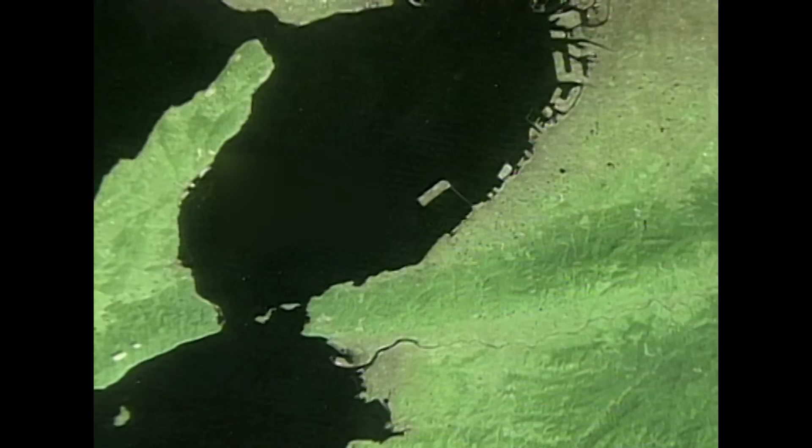Off the coast of Japan, there is a superstructure so immense it can be seen from space. The world's first airport in the midst of the sea. The largest man-made island of its day. The longest bridge of its kind. And one of the world's architectural masterpieces.

But its brilliant design could not conquer a hostile Earth. Today, low-tech ingenuity saves its high-tech engineering. Is Kansai the airport of the future? Or is it doomed to sink beneath the waves?

Japan, where modern skyscrapers dwarf the monuments of ages past. Where timeless serenity mingles with industrial might. And one of the world's engineering marvels rises from the sea. A superstructure for the 21st century, the mile-long terminal at Kansai International Airport hovers like a giant silver bird atop a man-made island in Osaka Bay.

Graceful in design, Japan's aerodynamic airport is a triumph of construction and a technological wonder. It was quite extraordinary to me that when the building first opened, it was getting 10,000 visitors a day who were not there to fly, they were there to look at the building. And that says something.

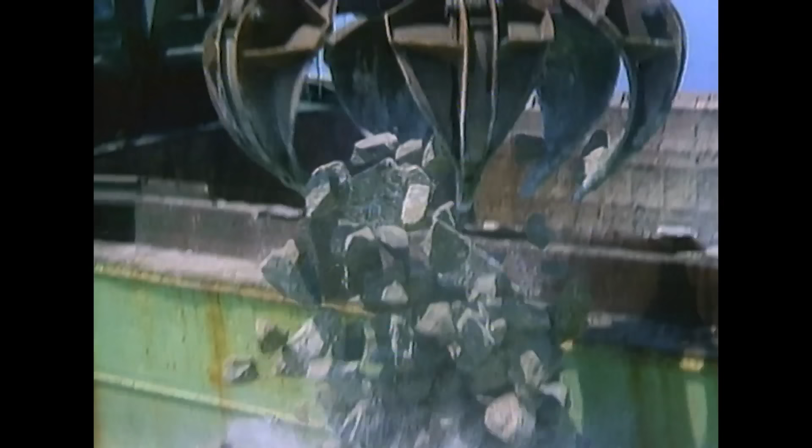To build the world's first ocean airport, architects and engineers probe deep into the laws of nature, searching for answers to the awesome challenges before them. Thousands of workers labored 7 years building the biggest man-made island of its day, more than 3 miles from shore in water 60 feet deep. Then crowning it with the world's longest building, the biggest public works project of the 20th century.

The airport is the first place and last place people normally see at your city. So you want it to represent something about your city. You want it to look good. You want them to have a favorable impression when they arrive and when they leave. We don't build big cathedrals anymore, but we build big airports.

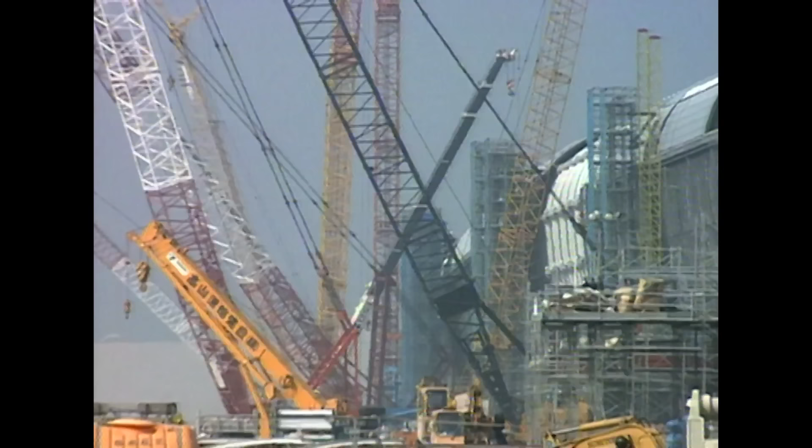Today, Kansai International is a glittering masterpiece, widely regarded as one of the world's most beautiful airports and one of modern history's most daring engineering projects. Before Kansai, no one had ever built an island in water so deep or so far from land. From steel girders to workers' lunches, everything had to be transported to the construction site by boat.

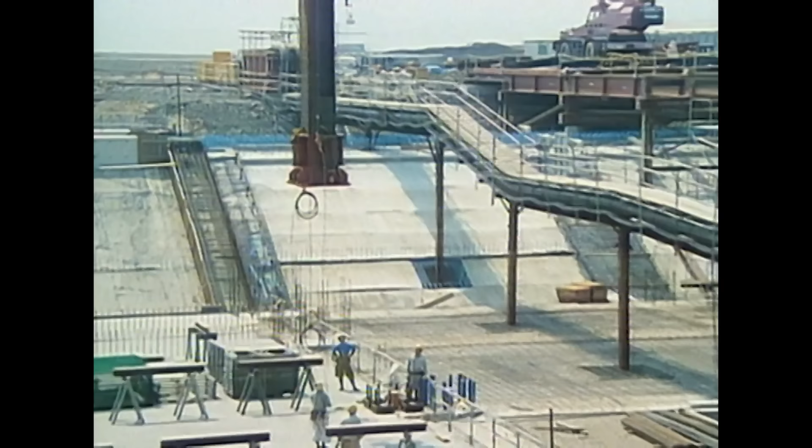To create the island, work crews had to move 750 million cubic feet of earth, pound 1 million steel columns into the ocean floor, and labor over 10 million man-hours. I scouted the location by helicopter, and I thought, oh my God, this might be a big challenge.

Why did Japan take on the challenge of building an airport on the sea? Because daunting as that challenge was, building Kansai International Airport on land would have been next to impossible. Kansai is a 10,000 square mile region in central Japan, straddling the island of Honshu, some 300 miles southwest of Tokyo. Within its boundaries lie two of Japan's most important cities, the sprawling industrial centers of Osaka and Kobe.

In the 1960s, Kansai cities were losing ground. Japan's imports and exports flowed through Tokyo. To compete with Tokyo, Kansai needed a new international airport. This airport was not only very important for Kansai, but also for the whole Japanese economy. Before Kansai Airport, manufacturing companies based in Kansai had to send their cargo all the way to Tokyo to ship it out of the country. That was very inconvenient.

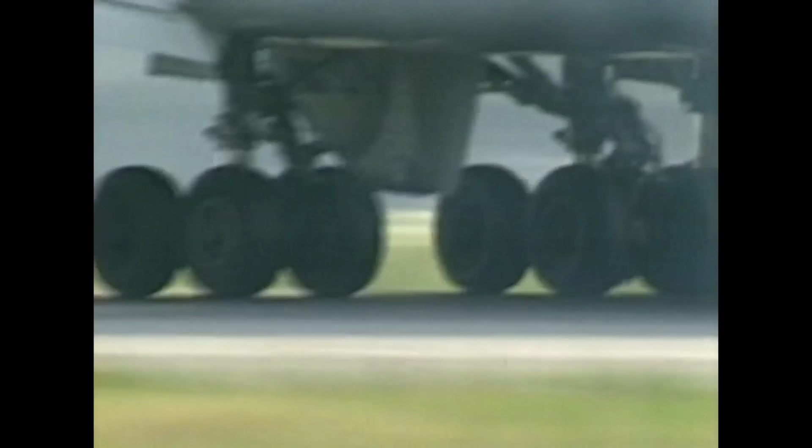Osaka's airport, Itami, sat in the middle of a residential neighborhood, dangerously hemmed in by buildings. The constant roar of jet engines disturbed its neighbors. There's no way that you can get around it. The airplanes fly over, they make noise, they have particles of emission from the jet engines, and those end up in people's yards, on people's roofs, and in people's ears when they're trying to watch television or have a barbecue.

Too many families lived in that area, so the potential there was a dangerous one if something ever went wrong. Thank goodness it didn't. At the far end of the runway, just on the approach, there was a school. We were always cognizant of the school being there, which is not the greatest thing. Expanding Itami was out of the question, but so was finding land for a new airport. In heavily populated Japan, there was little empty land and few people willing to give up land they owned.

In 1969, Tokyo began construction of an international airport at Narita, a distant suburb largely populated by farmers. When the government confiscated farmland to build the airport, protests exploded. Outraged farmers besieged the Narita construction site. Leftist radicals fired rockets across the runway.

Police arrested more than 3,000 activists. 7 people died. Protests delayed construction of Narita Airport for nearly a decade. In the Narita case, the government carried the plan forward without giving much information to the people. You might say the government forced its plan on the people, and that caused a strong movement against the construction.

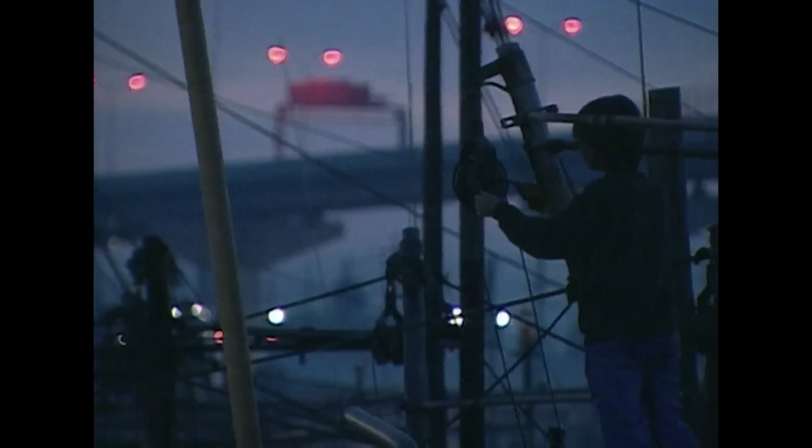But the plan had other perils. Osaka's fishermen might oppose a water airport as bitterly as Narita's farmers had battled an airport on land. Fish travel their own routes, which the fishermen know. If there's any change in those routes, it's very difficult for the fishermen to catch fish. It's not like the fish travel along marked highways. To find them again is very difficult.

To avoid another Narita, authorities offered the fishermen a huge fee as compensation for disturbing their fishing grounds. The fishermen accepted. Politically, the path was now clear. But the project's troubles were only beginning. By locating their airport on water, Kansai's planners had avoided battles with outraged citizens over land. Yet they would soon find themselves battling a far more powerful force, the force of nature itself.

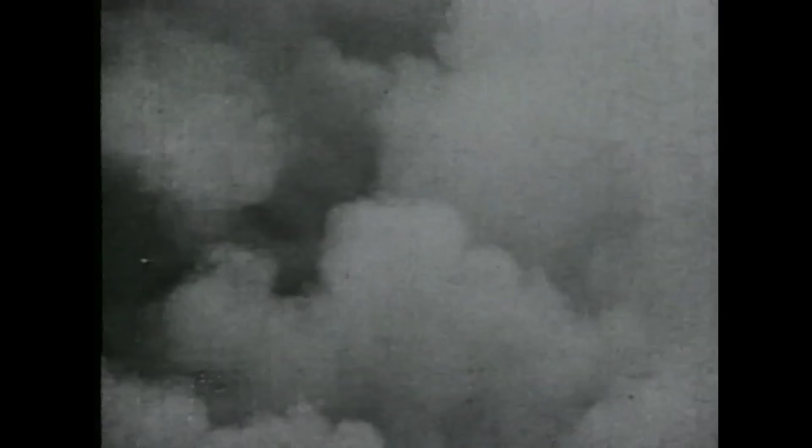Japan's 4 main islands have been called the most geologically treacherous real estate on Earth. 9 major earthquakes greater than magnitude 7 struck in the 20th century alone, killing over 150,000 people. Thousands of smaller temblors shake Japan every month. An earthquake's worst damage is often to structures built on landfill, which liquefies when shaken.

When it isn't shaking, Japan is reeling from some of the deadliest storms on the planet. Since World War II, hundreds of typhoons have ravaged the Japanese coastline, killing nearly 7,000 people. A typhoon's cyclonic winds can whip up what meteorologists call a storm surge, a dangerous rise in sea level. On September 21, 1934, a storm surge raised the level of Osaka Bay 10 feet for several hours. That typhoon killed 3,000 people.

3 miles from shore, the new Kansai Airport would be fully exposed to a typhoon's fury. Would a typhoon someday tear the new multi-billion-dollar airport apart? Would its foundations dissolve in an earthquake? Would storms or earthquakes sever its links to land? The new Kansai Airport had to survive some of nature's most powerful onslaughts.

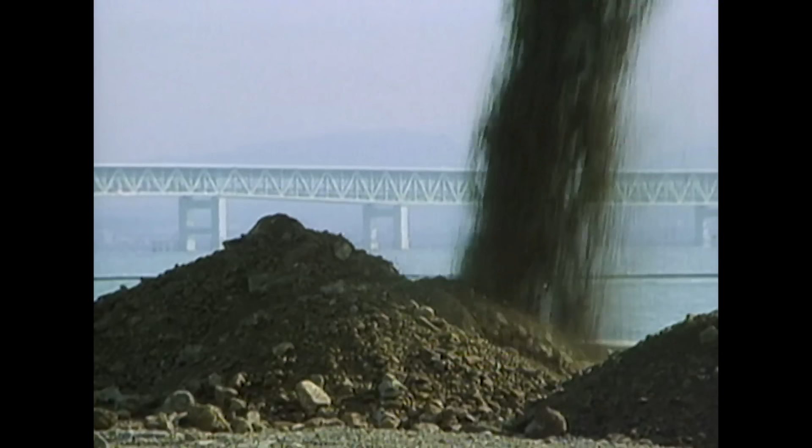Engineers designed an island 2.5 miles long and nearly 4,000 feet wide, framed by a huge rectangular seawall, whose perimeter would be 7 miles long. Into this massive frame, they would pour 750 million cubic feet of earth. It seemed like a simple plan, a larger version of other projects Japanese engineers had successfully completed many times before. In land-starved Kansai, the shore is lined with industries built on man-made land.

But 3 miles from shore, conditions were very different. The seabed is something like 100 meters or so depth of soft clay. So soft, in fact, that if you could drain the sea away, you wouldn't be able to walk on it, as a marsh. Tests showed that the airport island would rest on 2 levels of ocean-bottom clay. The upper layer, called alluvial clay, didn't worry engineers. They had built on it many times before.

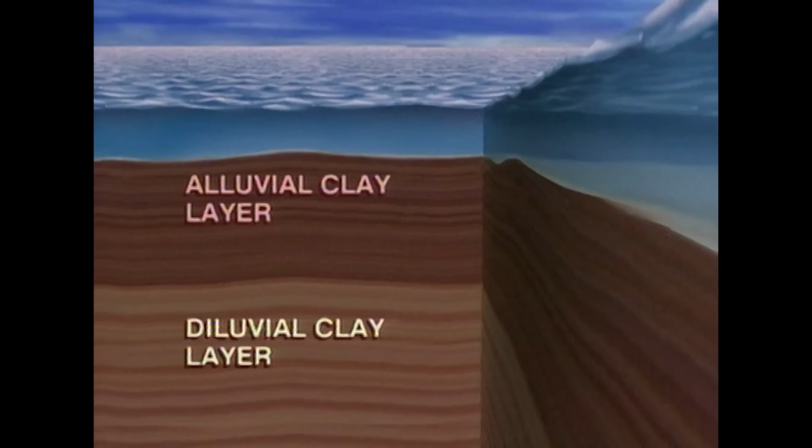But 3 miles from shore, there was a deeper, older stratum called diluvial clay, extending 1,000 feet below the alluvial layer. Engineers had never built anything on this diluvial clay. No one was sure how it would react when the world's largest man-made island began pressing down on it. So the new problem is how to predict the compression of deep-seated, old, stiff clay. That's, I think, the first case in the human engineering history.

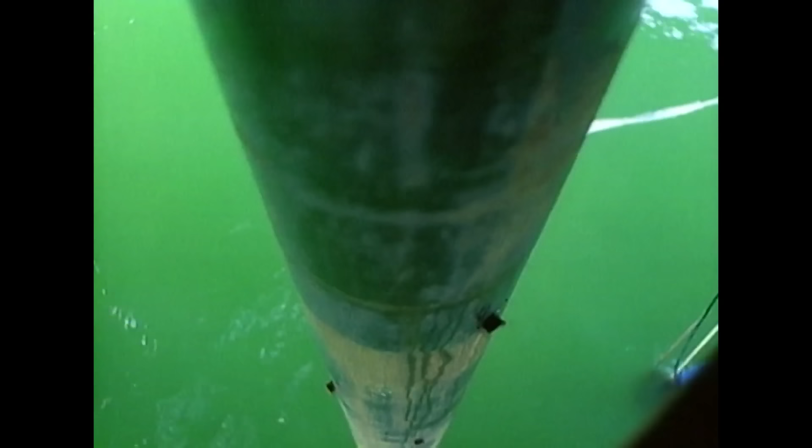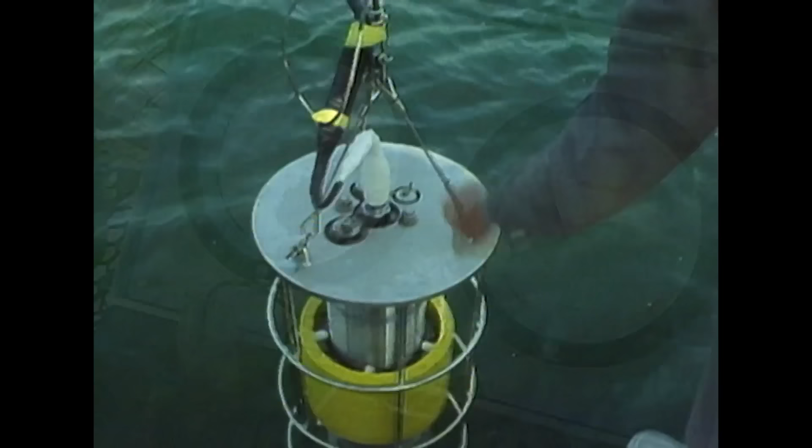In order to know the condition of the foundation ground, we developed a method of sampling the clay itself. We calculated things like strength and pressure density correlation to learn the characteristics of the ground. Scientists analyzed core samples from the ocean floor and gave differing predictions of how far the airport might sink into the clay. Some believed it would sink only 19 feet. Others insisted it could sink as deep as 25 feet.

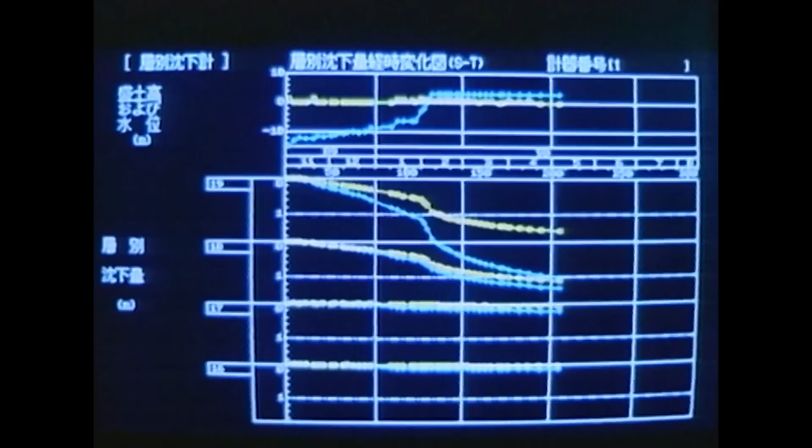Officials made a fateful decision. To save money, they rejected the predictions of deeper sinking and planned an airport that would sink only 19 feet. January 1987, with prayers for the safety of the workers, construction of Kansai International Airport begins. The first task is to strengthen the soft ocean floor clay so it can support the airport's immense weight. To strengthen the seabed, engineers use a well-tested method known as sand draining.

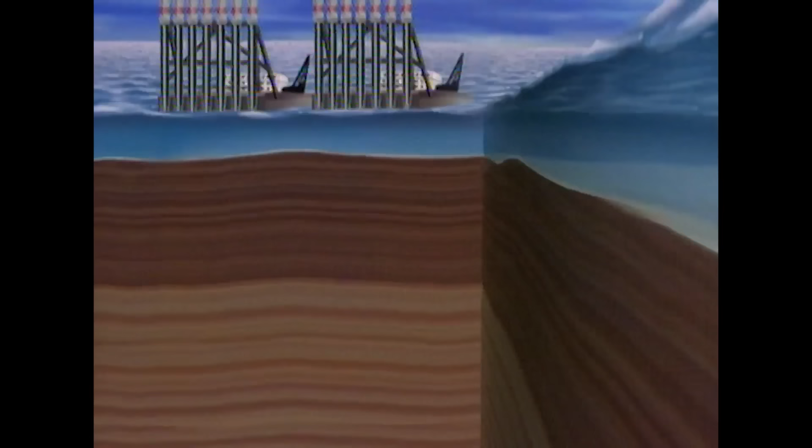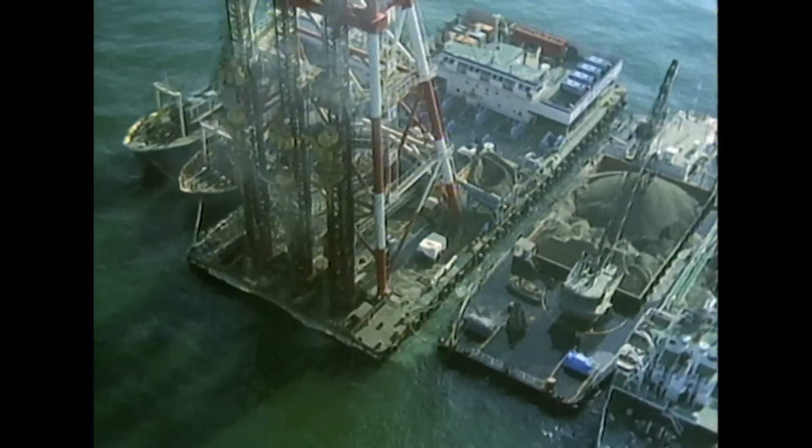Specially designed ships float over the construction site, first spreading a 5-foot layer of sand over the ocean floor. Then, hammering 1 million pipes deep into the clay. It's a fully automated process, controlled by shipboard computers. Next, enormous barges equipped with pile drivers force sand into each pipe. Finally, the computer-controlled ships pull out each pipe, leaving 1 million columns of sand.

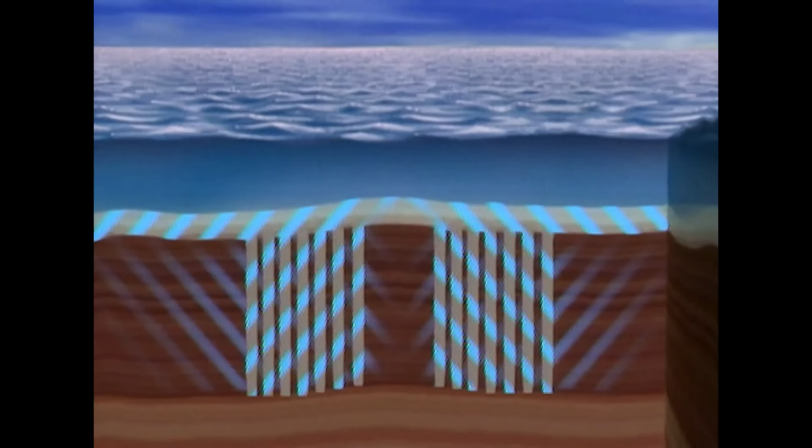When the finished airport presses down on the waterlogged clay, its weight will squeeze the water from the clay into the sand piles, draining the clay to make it harder. But the sand drains cannot reach the deeper diluvial clay. Nothing can be done to stabilize it.

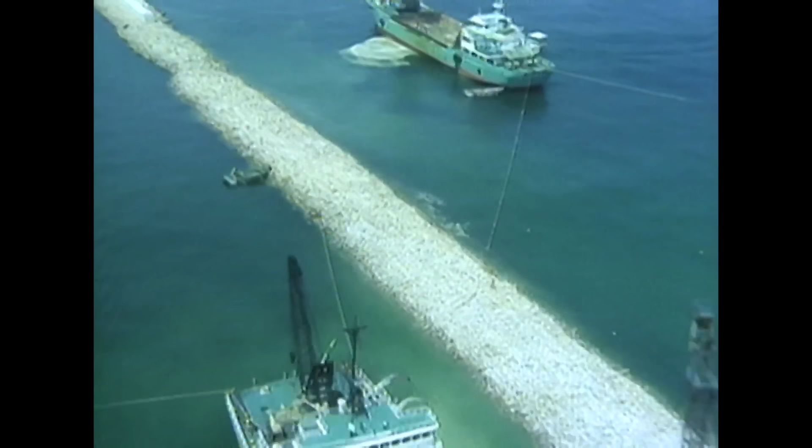With sand drains in place, work on the seawall begins. To keep waves from washing away its rubble slope, seawall workers must armor its surface with massive stones. 60 feet below the surface, divers guide these armor stones into position. The divers are veterans of many underwater construction projects, but none as deep and as far from shore as Kansai Airport. They face deadly hazards in the turbulent ocean depths.

At this place, we set stones that are about 1 to 2 tons each in the water. It was far from the shore, so there were bigger waves. It was a challenge for us. We did it even in tough situations like in bad weather. One guy had his leg amputated at the thigh because the waves moved a stone and it smashed into his leg. We were always close to death in a way.

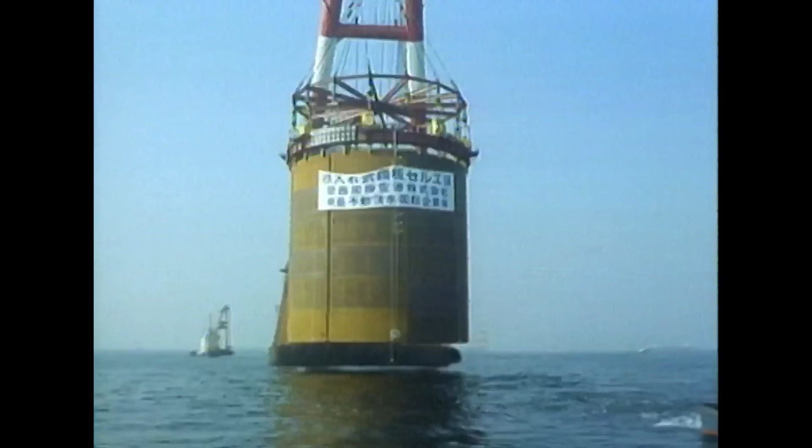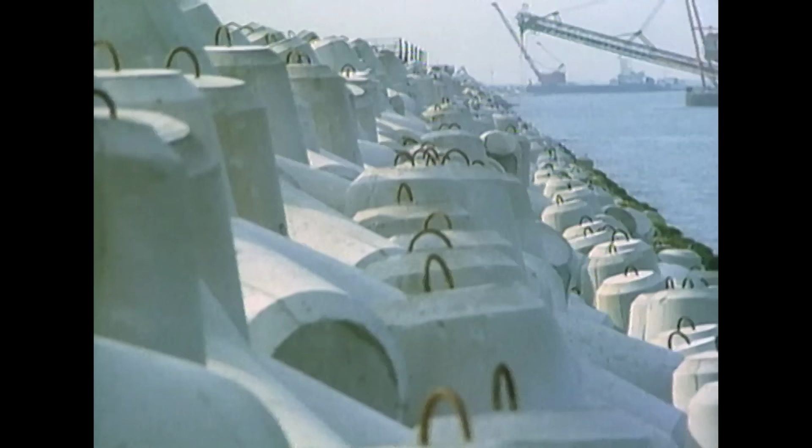Despite the dangers, work on the seawall continued as workers maneuvered 69 gigantic steel chambers into place. Each of these mammoth casings was 75 feet high, 75 feet in diameter, and weighed over 200 tons. Pile drivers pounded them into the ocean floor to form the corners of the seawall. Workers placed 48,000 four-pointed concrete blocks along the seawall's south and western edges, where the sea was strongest. These strange-looking blocks are designed to dissipate the force of breaking waves.

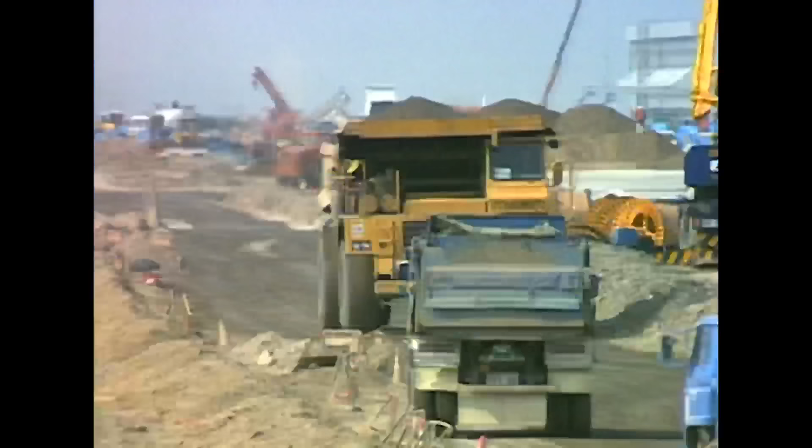By June 1989, 2.5 years after work began, the seawall was finished. Now, the airport builders had to find enough soil to fill it. On the mainland, crews worked round the clock excavating 3 entire mountains. Huge barges transported the excavated soil to the airport site. For 3 years, a fleet of 80 ships dumped earth inside the seawall until it rose over 100 feet above the ocean floor.

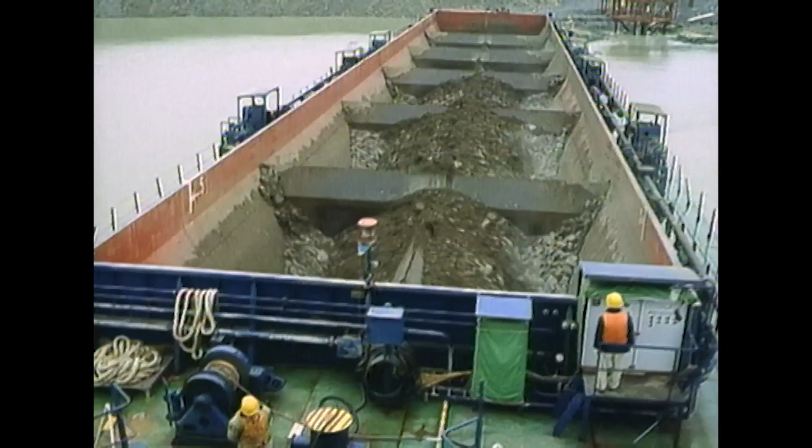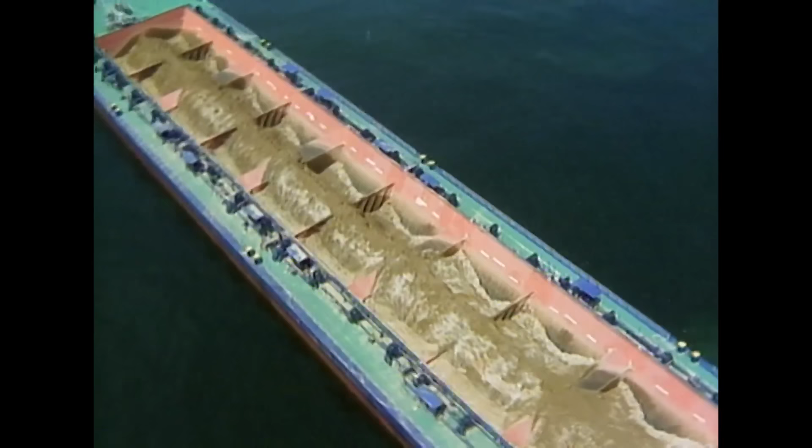Global positioning systems directed each barge through its onboard computers, telling it exactly where to dump each load. The island fill combined 3 different sizes of coarse rock and gravel. Engineers hoped this mixture would resist liquefaction in an earthquake. Slowly, the airport island emerged from the sea, despite violent protests.

The same leftist radicals who assaulted Narita Airport launched a mortar attack on one of the quarries supplying the island's fill. No one is hurt, but the exploding mortar rounds ignite a forest fire which rages for hours. It is only one of more than 24 attacks on the airport project during construction. Planting bombs, firing rockets, and setting fires, the radicals destroyed equipment and injured 4 people.

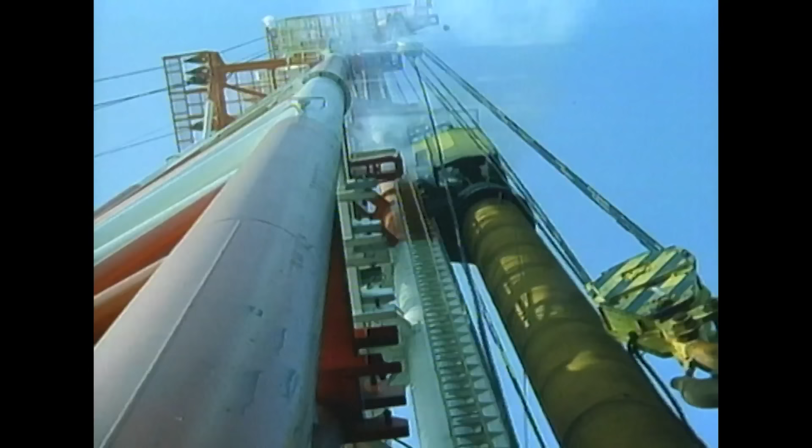But work never faltered. While some workers built the island, other crews were busy linking it to land. In the fall of 1987, giant floating cranes brought the first pre-assembled bridge pier to Osaka Bay, anchoring it on pilings driven into the seabed. By the spring of 1989, 29 of these piers stood in line between the airport island and the mainland.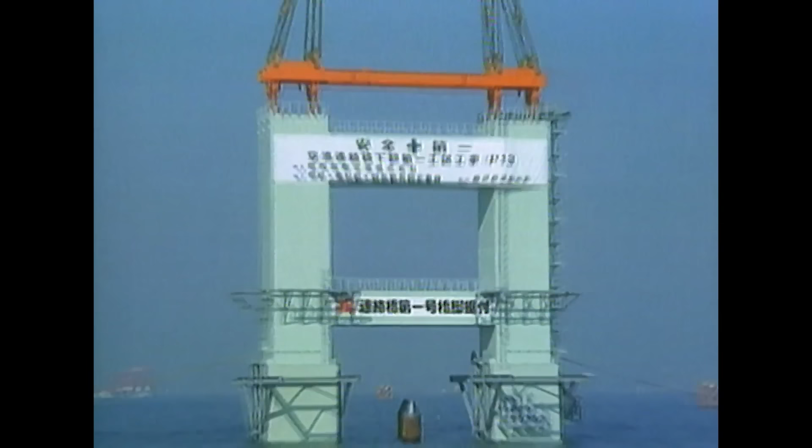The gigantic cranes returned with enormous steel modules, each over 500 feet long and weighing over 4,000 tons. Bolted together, they formed a double-decked truss bridge over 2 miles long, 1/3 longer than the Golden Gate Bridge, with a price tag of over $1 billion. Its upper deck was a highway, its lower deck a railroad track. Flexible joints connected its spans, so the giant bridge would bend, not break, in a typhoon's deadly winds.

By March 1990, the bridge was built, and the airport island was nearly complete. This man-made island was created by the effort, sweat, blood, and tears of over 10,000 people who worked very hard. But the island builders' celebration was a muted one. By then, they had discovered a new and relentless threat, an enemy so powerful it could defeat them.

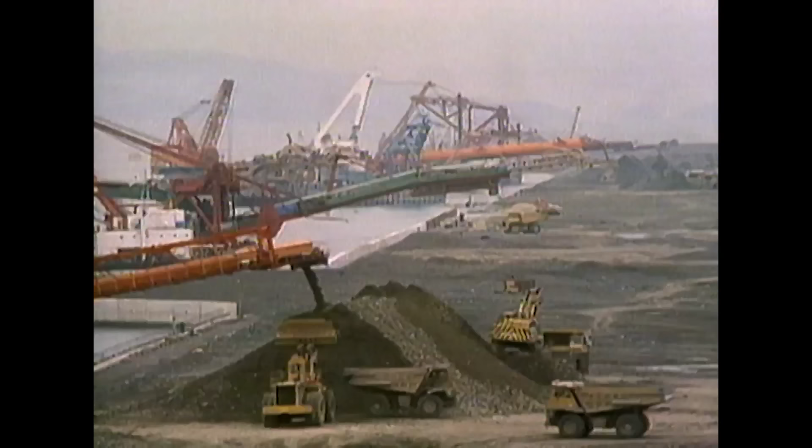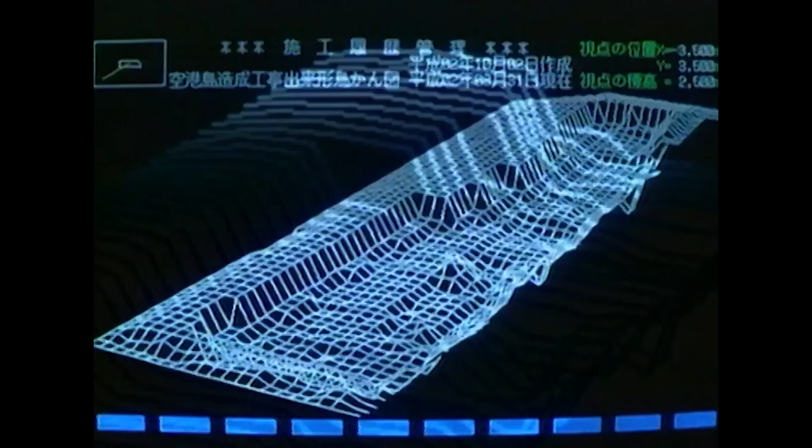Spring 1990, Kansai Airport's man-made island is nearly finished. Construction firms prepare for the monumental task of building the passenger terminal. But in March, engineers make an alarming discovery, which threatens to destroy the project. Kansai Airport is sinking into the sea. Airport officials had expected the island to settle some 19 feet into the soft seabed. But by March 1990, it had sunk 27 feet and was still sinking over 2 inches every month. No one knew when or if the sinking would stop.

No one knows exactly what to do, because it's quite different from our past experience. Its big size and a very heavy load. These two factors combined give rise to the effect of waking up the sleeping lion. The revelation stunned Osaka and the nation. The international press dubbed Kansai Japan's sinking airport. Some compared it to history's most notorious engineering blunder, the Leaning Tower of Pisa.

After 20 years of planning, 3 years of construction, and billions of dollars, it appeared that Kansai Airport might never be built. What had seemed genius now appeared to be merely hubris. As public outrage grew, the president of Kansai Airport resigned. Engineers scrambled to find a solution, if there was one.

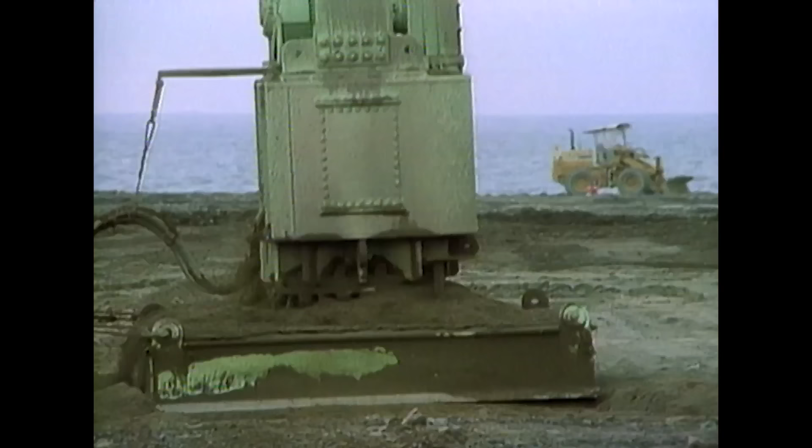We cannot stop the compression of this type of soil, although we can cope with the soil with various new techniques down to 50 or 60 meter depth. But now the soil in question is 200 meters deep. So we cannot apply any sort of artificial technique to that. To keep the airport above sea level, workers piled an extra 11.5 feet of soil atop the island at a cost of $150 million. They dropped a 20-ton weight 100 feet onto the runway to compact its soil.

They decided to pave the runway with asphalt because asphalt would absorb earth movements better than concrete. Yet their greatest problem remained unsolved. It was time to construct Kansai International's passenger terminal. But how could they build it on a sinking island? While engineers debated, the terminal's architects perfected its design.

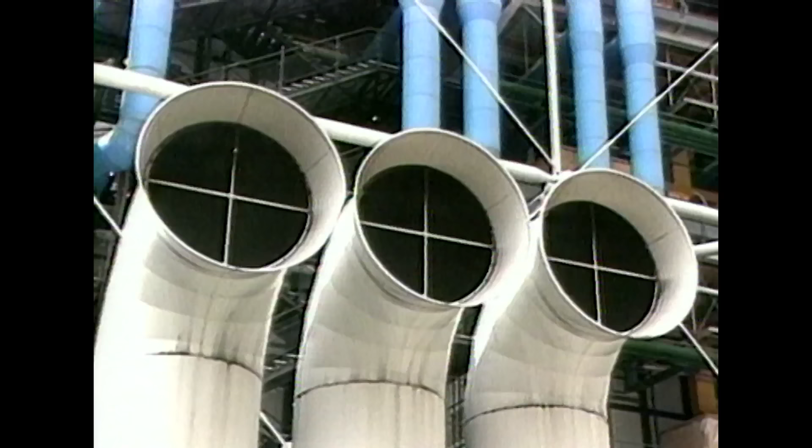Noriaki Okabe had spent 25 years in Europe working with world-renowned Italian architect Renzo Piano. Together, they had created some of the world's most remarkable buildings, including the famed Pompidou Center in Paris. But at Kansai, they faced the challenge of their careers.

The Kansai terminal had to be small enough to fit on a man-made island, yet big enough to house all the complex functions of a modern international airport. High enough to inspire passengers with its beauty, yet low enough to allow air traffic controllers an unrestricted view of every airplane on the tarmac. It seemed an architectural paradox.

Architects usually get stimulated by looking at the site before the work starts. This project was unique because there was no site yet. There was no ground. Seeking new sources of inspiration, the architects turned to the structures of nature. Nature's geometries solved their most difficult problem: how to make the terminal both high and low.

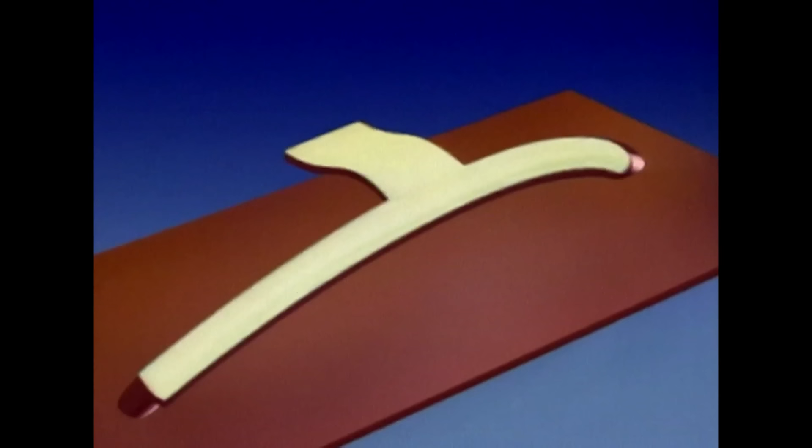Answer: the toroid, the remarkably versatile shape of magnetic fields, convection currents, bicycle tires, donuts, and fruits. In its architect's eyes, the enormous Kansai terminal is only the small visible portion of an immense toroid over 20 miles in diameter, circling through the Earth.

The toroid shape allows the building's center to soar 85 feet high, while its wings taper to 20 feet, inspiring visitors, giving the control tower a clear view of aircraft, and making architectural history. It is the most pervasive form in the natural world, the toroid. And so far as I know, this was the first time it had been used, certainly the first time it had been used in a big structure.

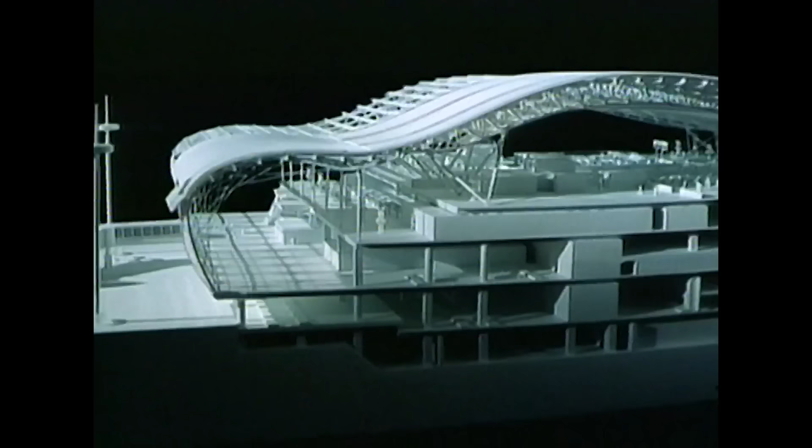Since Kansai was designed, the toroid has become a very fashionable form, particularly architects working with British engineers who've mastered how to use this form. But it was innovatory at its time. The toroid solved the problem of designing the passenger terminal. But still unsolved was the biggest problem of all: how to construct one of the world's biggest buildings on an island sinking into the sea.

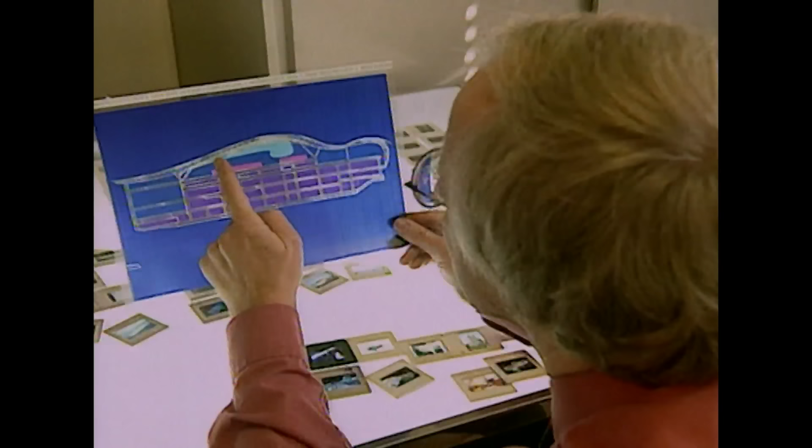By the spring of 1990, an international team of architects and engineers had created a cutting-edge design for Kansai Airport's passenger terminal. The blueprints were ready, but the terminal could not be built until the builders solved a puzzling problem. The completed terminal would weigh only half as much as the vast amount of earth excavated for its foundation from an island that was sinking into the sea. The lighter terminal would not sink as fast as the heavier island. As island and terminal pulled apart, the massive structure was certain to crack.

The problem is not that the building is sinking into the ground, but that the ground is sinking faster than the building. People don't realize, but the building actually floats in the earth. That's one of the reasons they have to have basements. They're like ships. And that's particularly true of new earth. So Kansai Airport has a ballast of 250,000 tons of very dense iron ore in it.

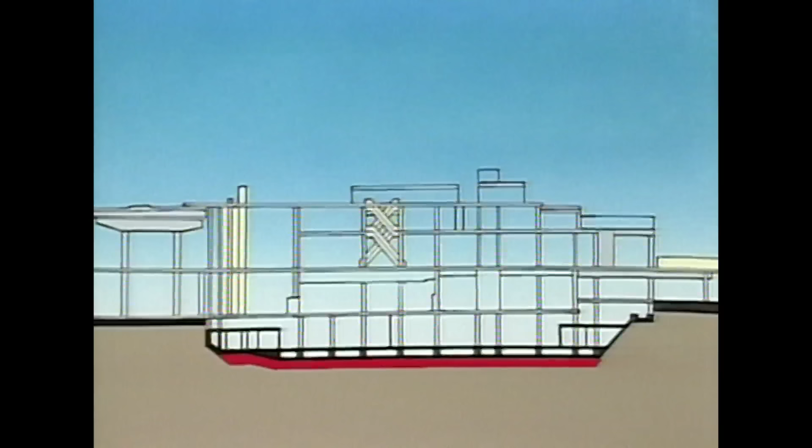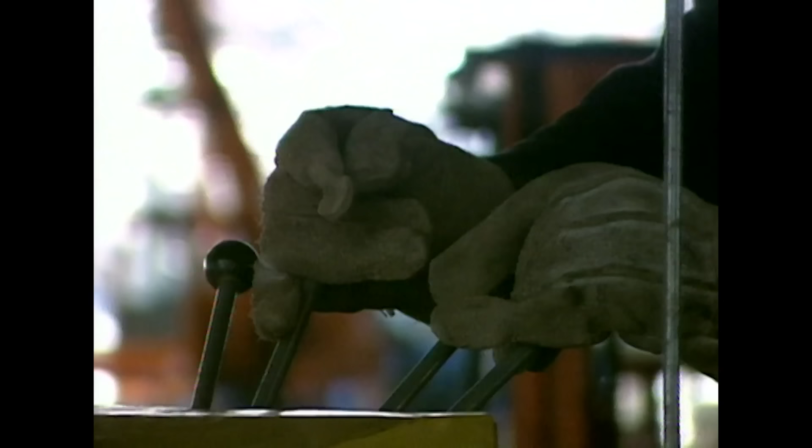As they prepared to build the terminal, engineers lined its foundation with an 8-foot thick layer of crushed iron ore, hoping the extra weight would help the terminal sink as fast as the island. On April 24, 1991, terminal construction began. It would take nearly 3 years to complete. Following the architect's blueprints, workers erect some 30 steel trusses to support the roof. Each of these massive trusses weighs over 200 tons.

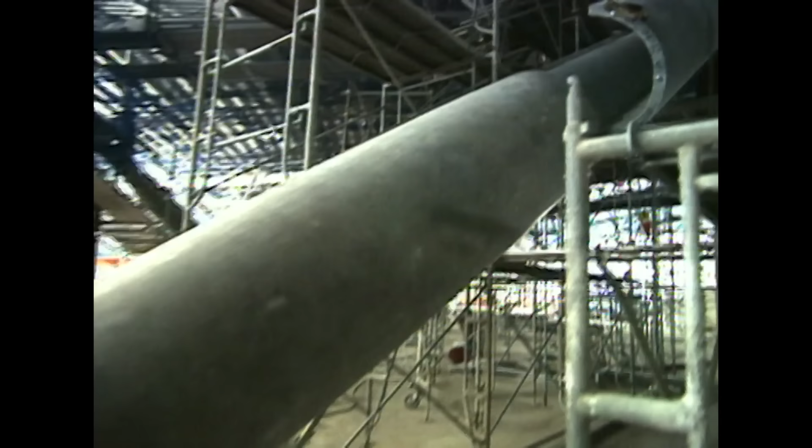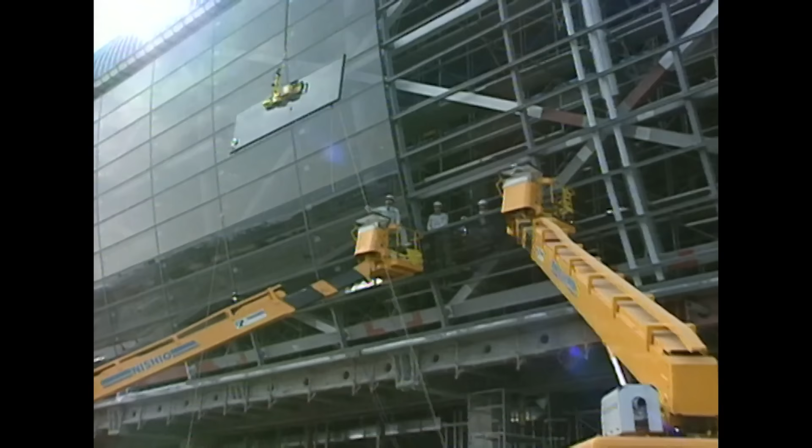Then, workers assembled the terminal's skeleton of 250 ribs, each forged in England and carried by ship to Japan. They installed nearly 5,000 panels of glass on its sweeping front, carefully encasing each panel in a rubber frame, so it will move, not break, if an earthquake or a typhoon sways the building.

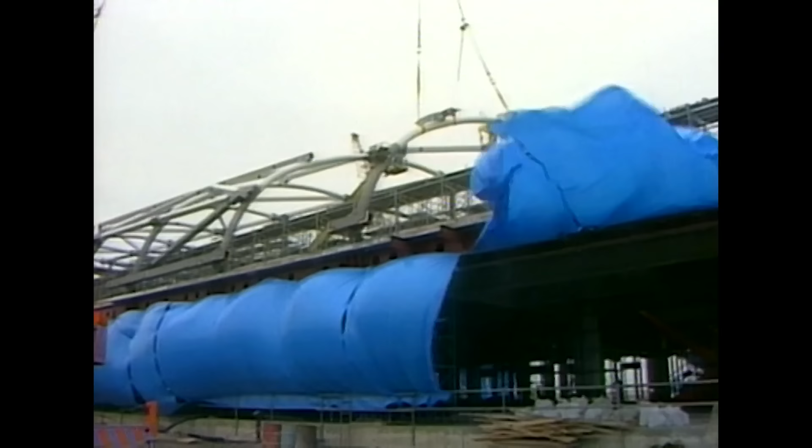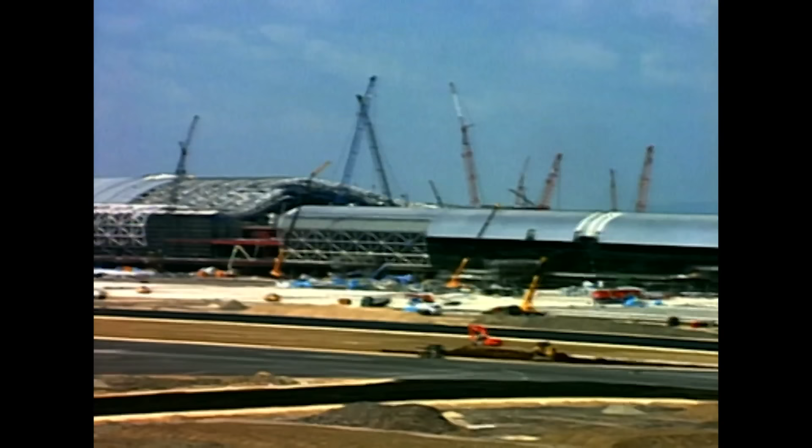They cover the roof with 90,000 stainless steel tiles, tested to withstand fierce typhoon winds and violent seismic shaking. With painstaking effort, workers lay each of these tiles individually by hand. High ocean winds make their task even more difficult and sometimes impossible. By 1993, the terminal's enormous shape rose above the airport island. Over 1 million architects, engineers, and workers around the world had contributed to its construction.

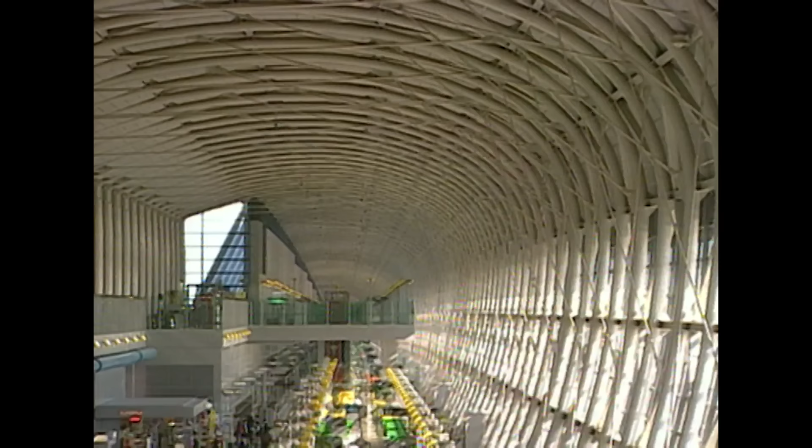Today, Noriaki Okabe wanders with pride through a superstructure, widely proclaimed as one of the most brilliantly designed airport terminals in the world. It's a very big building, Kansai. It's possibly the longest building in history that is not a factory, but one huge room occupied by people.

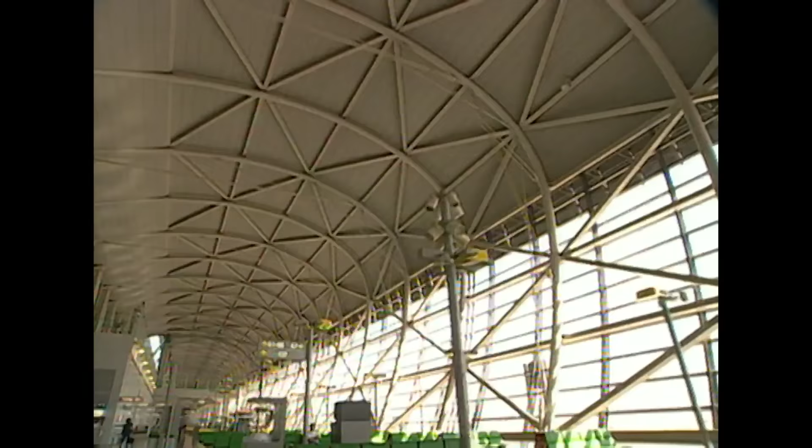But what's very striking is the very intimate relationship it sets up between you, the person moving through, and the building that is making way for you, leading you through, guiding you through. This is a very extraordinary sense to get in what's a highly technological, enormous building. I think that's one of its most extraordinary achievements.

Arriving by car, rail, or hydrofoil, passengers enter what the architects call the canyon, a vast open space 100 feet high and nearly 1,000 feet long. 4 cavernous stories linked by humming escalators and whirring elevators. Designed to impress, but also to inform. The reason why this space is so huge is so that people can see where they are going. Any spaces in this structure can be seen from wherever you are.

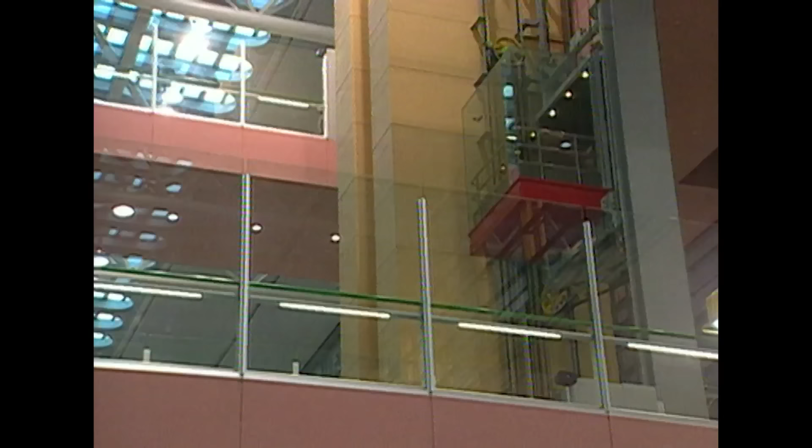As they move beyond the canyon, passengers don't have to navigate a sprawling multi-terminal complex as in many other airports. Domestic and international arrivals and departures are vertically stacked on the 4 floors of the terminal building. Passengers travel up and down a central set of escalators, which carries them to arriving and departing domestic and international flights.

Finally, they emerge into the terminal's spectacular departures area, a kind of aviation cathedral stretching over 1 mile long, making Kansai Terminal the longest building in the world. Automated trains whisk passengers to its 41 aircraft gates. Travel time from the central terminal to the end of each wing is only 90 seconds. Clear of the door.

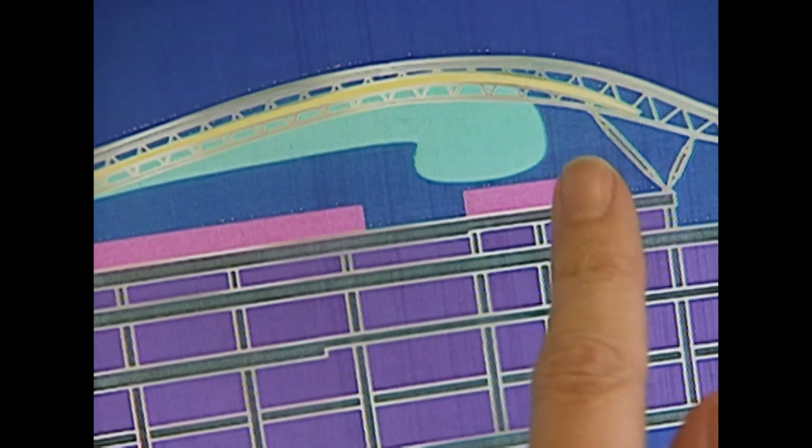An ingenious system solves a baffling problem. How do you air condition the world's longest building? If you blow a big air jet into a very large space, it travels so far. Now, what we did on Kansai, which I think is quite innovative, was to create a shape of ceiling which was similar to an air jet shape, and to stick the jet to the ceiling. If you make a jet of air stick to the ceiling, then it travels up to twice as far as it would if it was in free space, and it will cause a much bigger circulation current.

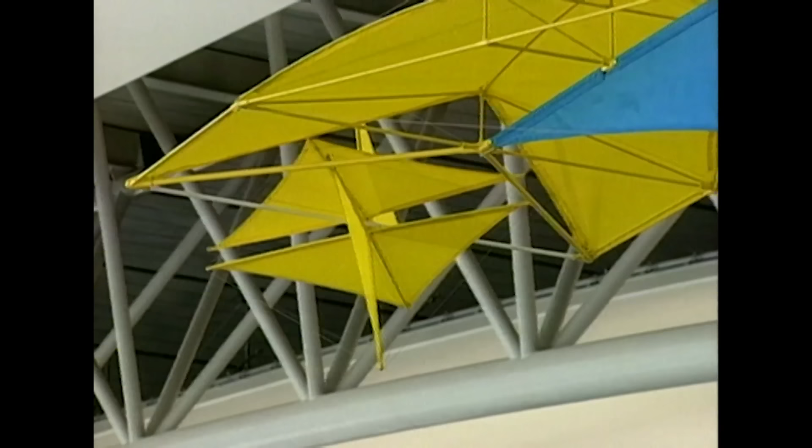Gigantic yet graceful, 18 nozzles send air flowing along the ceiling into sheets of smooth fabric, which keep it circulating. Colorful mobiles reveal the moving air. It's the first time it had been done at such a big scale, and it's the first time in which the shape of the roof and structure was exactly shaped to the decelerating air jet. It's a building that is most in step with what is happening in the sciences and must herald the future.

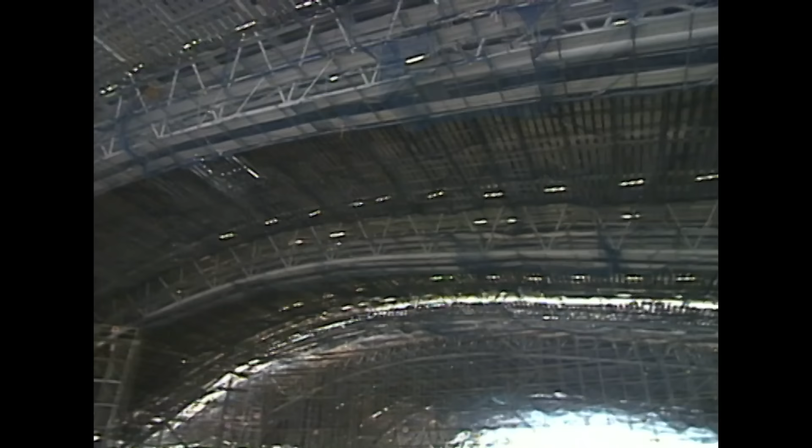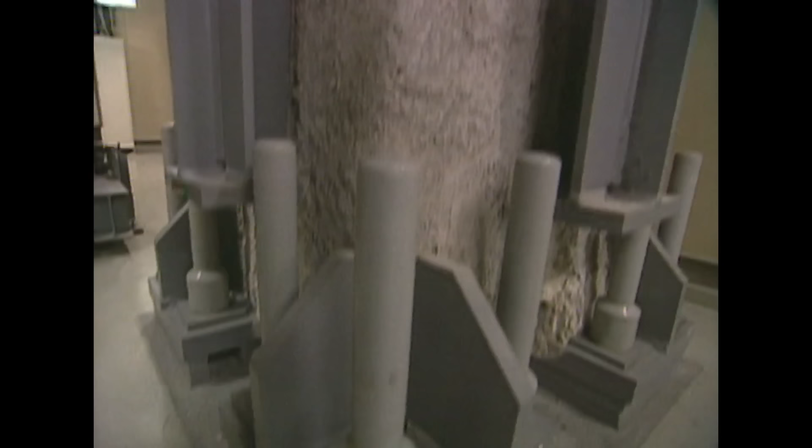But when it was finished, Kansai Terminal's future remained in doubt as the island beneath it continued to sink. Even with its iron ore ballast, the terminal would almost certainly crack as the heavier island beneath it sank. Engineers devised a surprisingly simple solution. In the basement, 900 concrete columns support the building's massive weight, but that's not all they do. As the terminal sinks, sensors on the columns alert computers in the central control room. Technicians scan the computer screens, looking for trouble spots.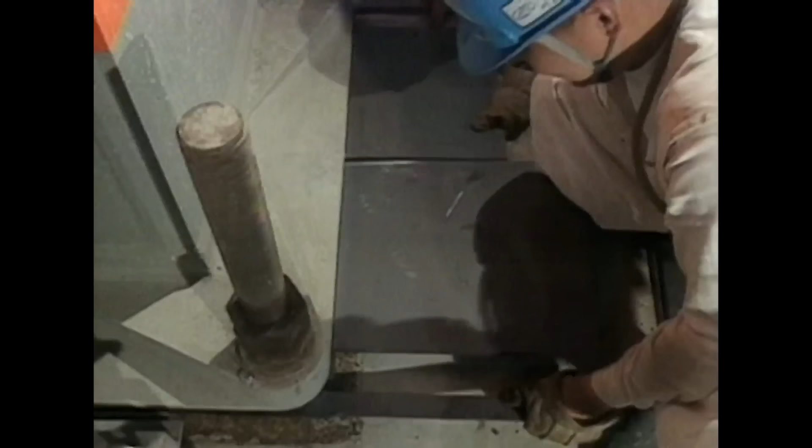Workers slide iron plates under the jacked-up pillars to hold them up after the jacks have been removed. It's no different than sliding a matchbook under the leg of a wobbly coffee table. But Kansai Terminal has 900 legs and weighs nearly 3 million tons. It's a solution which, as I understand it, has been used before in Japan, and it might seem a bit primitive, but I have no reason to suspect that it's anything but perfect for the problem.

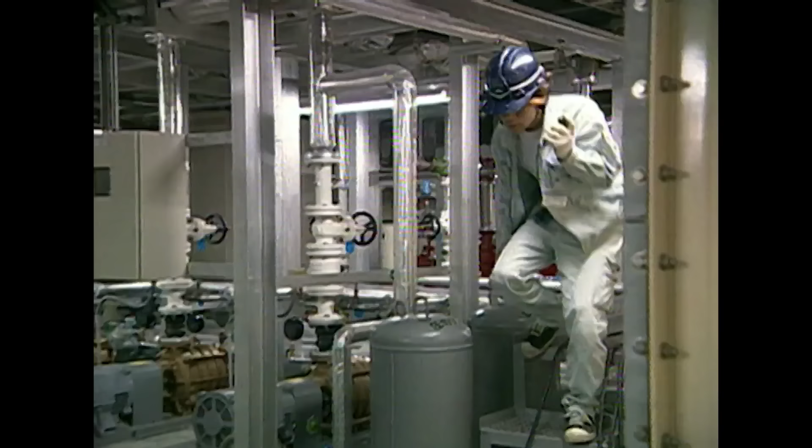In fact, everything in the Kansai Terminal's basement is designed to move up and down. Air conditioning and other systems are bolted to the ceiling instead of the floor. Doorways feature several inches of extra room overhead. In their zeal to save the Kansai Terminal, engineers tried to think of everything.

This terminal building is being adjusted at all times. I'm on the stairs which connect the first floor and the basement. The step where I'm standing right now was the height of the floor when the airport opened. In the last 4 years, we jacked it up 3 times, and as a result, we added 2 more steps here. Measures like these helped the airport cope with its sinking island, but they also delayed its completion by over a year.

On September 4th, 1994, Kansai International Airport finally opened for business. The Emperor's son, Crown Prince Naruhito, and his wife, Princess Masako, attended the opening ceremonies. 11,000 police stood guard in case radicals attacked. As they celebrated, the airport's proud builders could not know that nature's fury would soon assault their masterpiece.

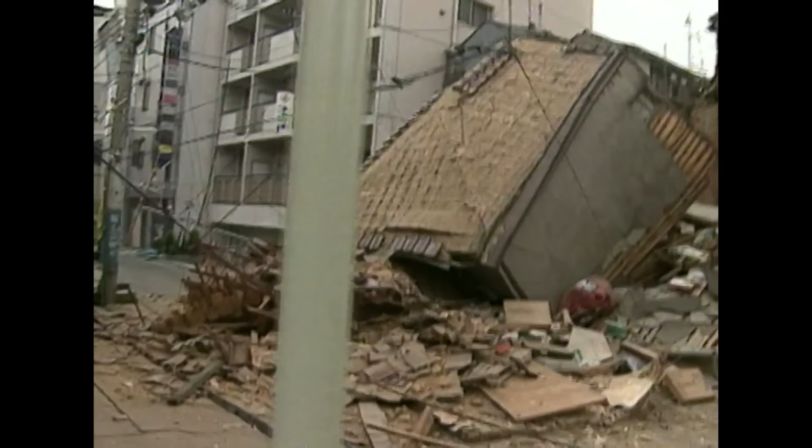I was still in bed because it was quite early in the morning. It was a very huge, up-thrusting movement. Dishes jumped out of the cupboard in my house. I had never experienced an earthquake that big before.

Hardest hit is the city of Kobe. The city's wharf rises 10 feet. Cranes topple, and a harbor breakwater sinks. Rail lines and major highways buckle.

The quake kills more than 5,000 people and injures over 25,000. More than 300,000 people lose their homes. Kansai International Airport is only 18 miles from the epicenter.

When the earthquake hit, the first thing I thought about was my family. Then I thought about the Kansai airport. Maybe the glass has broken. Fearing the worst, officials rush to the airport. Outside the terminal, they find a cracked sidewalk and few other signs of damage.

I raced to the airport in my car and arrived before 7 o'clock. When I rushed into this control room, all the machines were operating properly. The airport had survived one of nature's deadliest assaults, or had it. With so much devastation nearby, it seemed too good to be true.

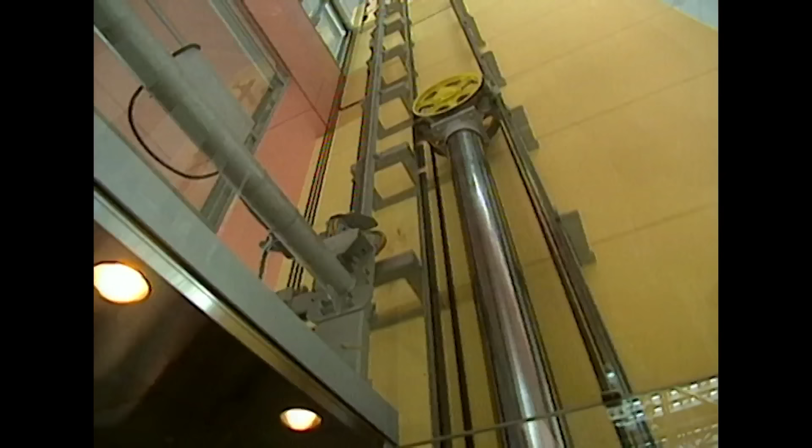When I came to Kansai Airport, we could see Kobe was burning. Although you couldn't see anything wrong, I had great anxiety about the airport's invisible parts. The inspections confirmed that the airport's anti-earthquake measures had worked.

Engineers had used a mixture of large rocks to build the airport island. When the earthquake hit, this coarser landfill absorbed the shaking. Had the fill rocks been smaller, the island soil might have liquefied. Airport buildings would have collapsed, as so many other structures did.

Instead, the delicate-looking passenger terminal proved as tough as its architects had hoped, thanks to its ingenious design. For example, at this bridge, that side of the building is fixed, and this side has a sliding system to absorb the shock. At the time of the Kobe earthquake, this point moved almost 4 inches.

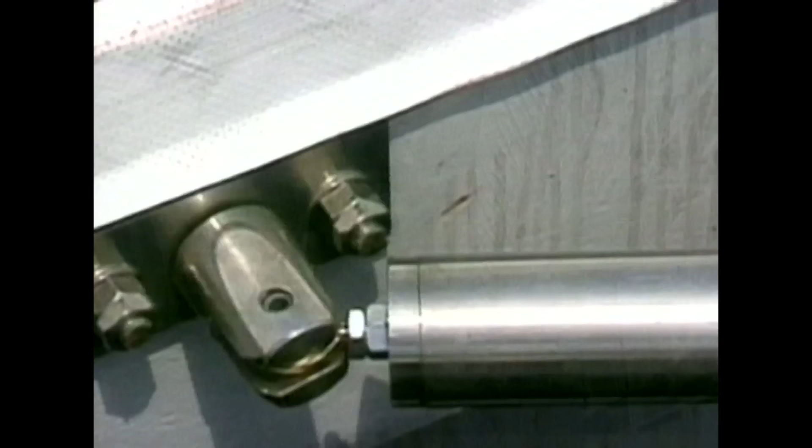Even the terminal's massive glass walls were intact. It was important not to transmit the movement of the roof in an earthquake to the glass wall below. We designed a system which absorbed all movements between the two structures by using sliding or rotating joints. During the Kobe earthquake, this system worked so well that not a single pane of glass was broken.

Kansai International remained open throughout the crisis, serving as a staging area for arriving rescue teams and supplies. The building was, in fact, the building closest to the epicenter of the earthquake that destroyed Kobe. That doesn't mean to say it was hardest hit, because the buildings in Kobe were equally hit hard. But because it had been designed to cope with all these things, it rode it out without any damage at all.

Surviving the Kobe quake was a triumph for Kansai's beleaguered engineers. The airport had passed a significant test of its engineering and design. 3 years later, it would face another as nature struck again.

September 22nd, 1998, a powerful typhoon slams into the Japanese coast, killing 10 people and injuring more than 200. Winds clocked at 130 miles per hour roar across Osaka Bay, whipping up dangerous waves and slashing rains. By noon, the storm's full fury reaches Kansai Airport.

The typhoon had increased speed to the point where we were arriving at the same time, and we did have quite strong winds. But the difficult part was the people who tried to park us on the ground to keep them from getting blown away, literally. Right after we landed, in fact, the airport authority closed the airport because of the difficulty on the causeway between the mainland and the island. It became unusable for vehicular traffic.

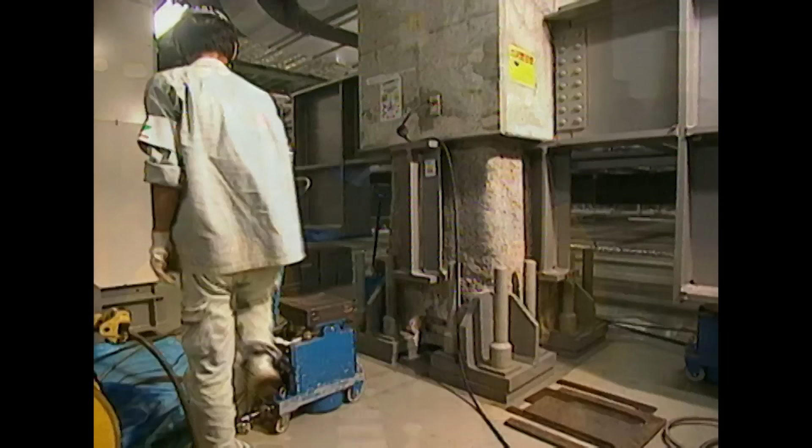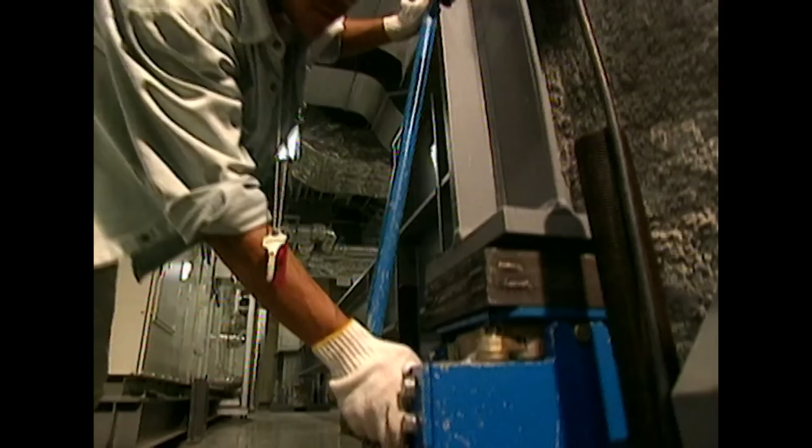Kansai's ingenious jacking system keeps the terminal building level, but it cannot stop the island from sinking. Every year, the airport sinks a foot deeper into the sea. Scientists debate how much farther the island will sink, but some believe that if it keeps sinking, a typhoon's waves will someday swamp the airport.

Next countermeasure is how to prevent the invasion of water. We are going to start with this sort of countermeasure maybe 5 or 10 years' time from now. If the top elevation of the man-made island goes down beyond some special value, in high tide time or typhoon time, it's quite easy for seawater to flush inside the island. That's our greatest concern at the moment. Airplanes cannot land in the pond, so the runway must be dry all the time.

To keep out storms, engineers must build a higher seawall around the airport. But this is not the only challenge they must meet. If Kansai Airport is to survive economically, it must expand. Since it opened in 1994, its volume of international flights has nearly doubled. Its single runway can handle 160,000 takeoffs and landings a year. By the year 2007, it will reach that number. Without a second runway, Kansai will choke on its own traffic.

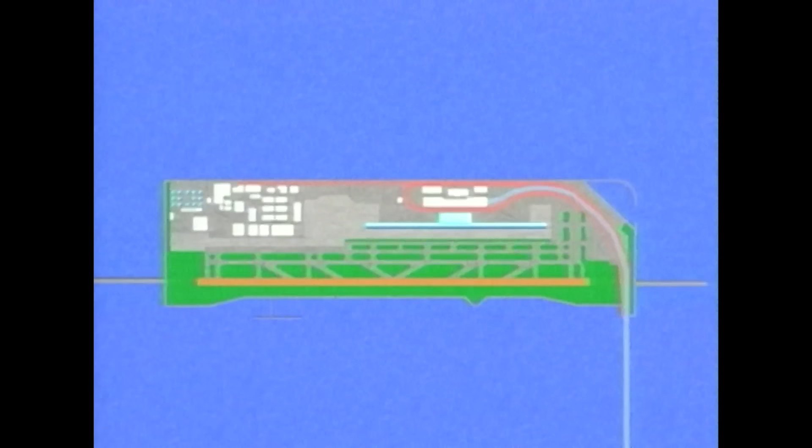The airport plans to build a second runway and terminal on a parallel island connected to the original airport. But this island must be built in water even deeper than the first. The seabed is even softer. Scientists believe the second island could sink even farther than the first.

At the new site, we have to construct the island on a bad, soft foundation. Since it is impossible to do away with subsidence, we are thinking of constructing a second terminal building between the old and the new islands, which will float on the sea like a ship. Then we won't have to worry about it settling at all.

But sinking isn't the only obstacle to expanding Kansai International. Battling the sinking problem drove the airport's price tag to $15 billion, 40% over budget. Interest alone on the airport's debt is $560 million a year. Building a second runway will cost an estimated $14 billion more. Even if it never slides beneath the waves, Kansai International may sink beneath the crushing burden of its debt.

And yet the second runway must be built. The airport's future, and perhaps the lives of its passengers, depend on it. If you're going to be a major hub airport, you're going to really have to have 2 runways. Because what happens if something goes wrong? What happens if you have an airplane that blows a tire and you're really a hub? A hub brings in a lot of airplanes at one time.

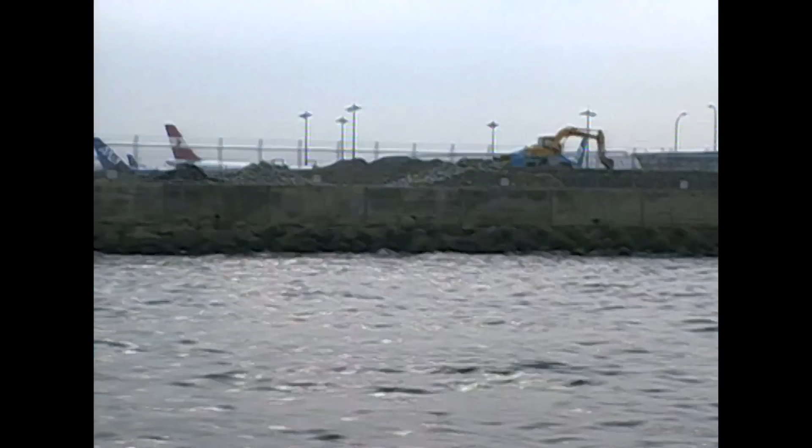Though surrounded by water, Kansai International Airport finds itself between a rock and a hard place. Hong Kong and Singapore now have new state-of-the-art airports. Tokyo's Narita is building a second runway. To hold its own in the highly competitive world of Asian aviation, Kansai must expand. Engineers need the second island as much as airport officials do. They want to build higher seawalls to keep typhoons from someday swamping the first island. To build those walls, they must temporarily close the original runway.

Yet the immense cost of saving the airport, added to its already huge debt burden, may cripple its future. Kansai International Airport may never fulfill its builder's dream of becoming one of Asia's leading aviation hubs. But somehow, it's not Kansai's troubles most people remember. It's Kansai's achievement. Its landmark design has won the praise of critics the world over and earned the approval of the thousands of awestruck travelers who pass through it each year.

I think it'll be some time before what has been achieved there will be fully understood. The lessons will be learnt probably in the 21st century more than in the next few years from Kansai. People will understand more deeply what's been achieved there.

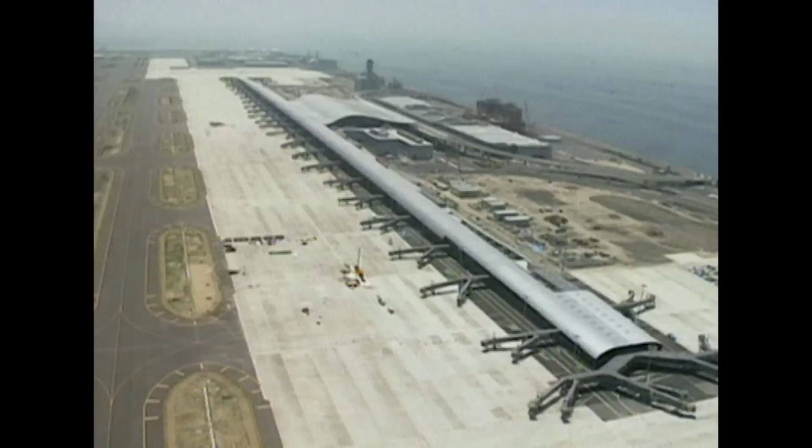I believe that the legacy that people are going to remember about the airport is that they built something that was never heard of before for an airport, and that even though they had problems, they found very good solutions to make it work, and in fact it became an engineering marvel in several aspects. Number one, that they were able to fill it, and then when it didn't settle at the rate that somebody had calculated, that they were able to solve that problem and continue to operate.

Whatever its future holds, Kansai International Airport will always be a monument to a bold vision. A vision that dared to accomplish something no one had ever tried before. A vision that literally moved mountains, created land in the midst of the sea, and graced Japan with one of the world's most beautiful airports.